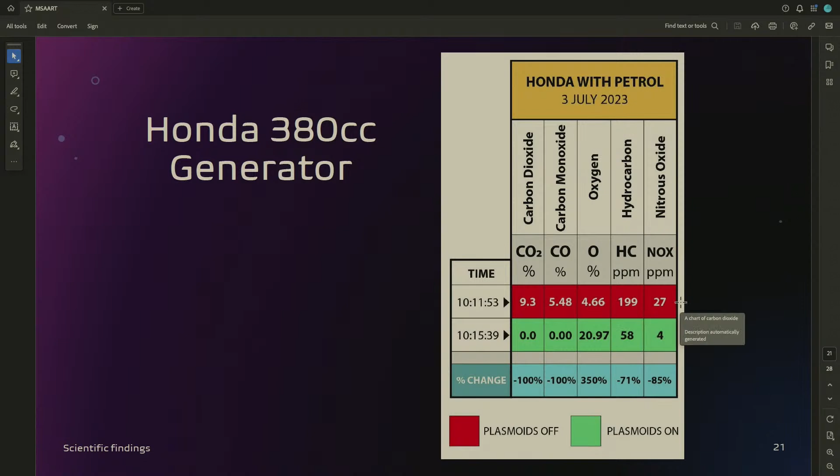But you know, maybe. But what I can say is, when the thing is operating, you don't smell a lot of hydrocarbons. And if I'm hanging around by an exhaust where it's kicking out 5.48% carbon monoxide and it's in confined space, I would imagine that I would get a headache and fall over rather quickly. So certainly the smell wasn't there. But then there are other things that might be produced which could be odorless, and so these things need to be investigated.

This same generator, they can switch over from petrol to tip gas, and this was the other piece of data that was shown, the Honda with tip gas. And again, with the tip gas, you have this big drop. But interestingly, the carbon monoxide is already low here, but it still gets reduced. The oxygen seems to go up, and so it's interesting.

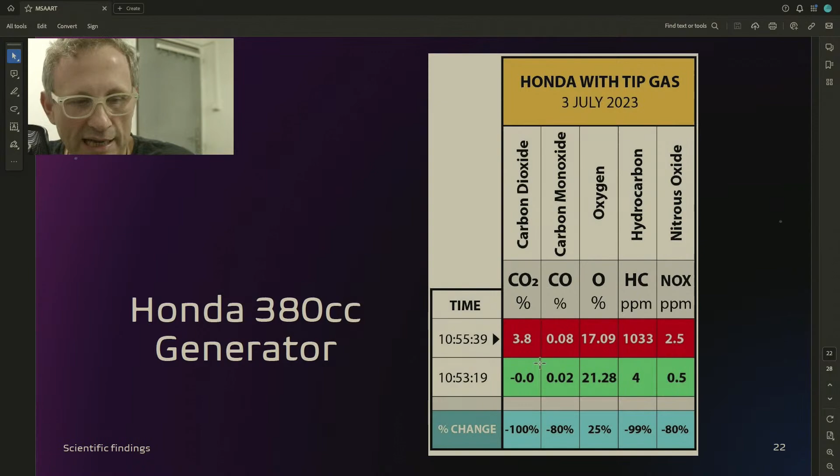But where is the carbon going? Now, when it comes to the big device, this particular client is only interested in the carbon monoxide because they have a limitation with how much carbon monoxide they can run in a particular area.

And so I think it limits them to 4 generators in this particular area, but they can actually host a whole load more. And the reality is that if the limit is 4 times this amount, it means you've got 4 times the amount coming out from one generator. But if that's going from 4.52 down to 0.09, it means that they could basically stack out this whole area that they could fill with generators and maximize their return for their investment. This is over and above any potential gains they might gain from any extra efficiency.

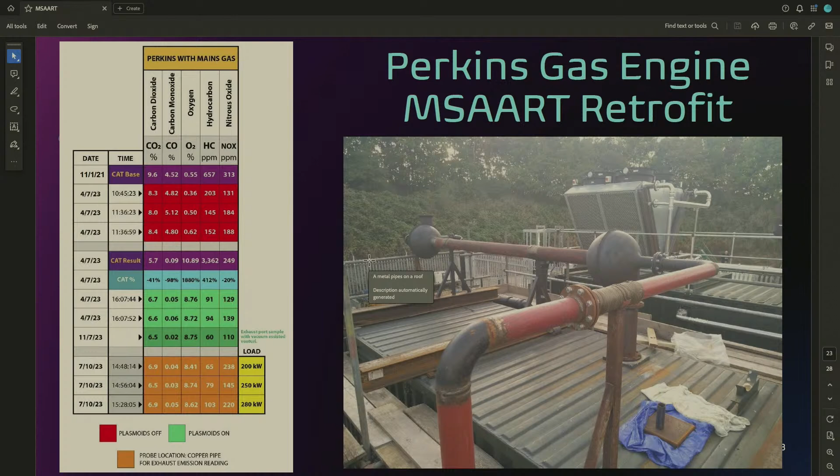So that alone is beneficial to this particular customer, and that may be the case for many customers. And the reality is, actually, Malcolm told me that in the Maldives, basically every island hotel has one of these generators, which is for desalination and electricity for the island, or rather for the hotel. And if they save 13% of their fuel, they use 13% less. That is an enormous saving for the hotel. Secondly, it's actually better for the environment straight up. And then thirdly, they don't run the risk of killing their hotel customers with carbon monoxide poisoning.

And actually, that is a reality for generators all over the world. There are, I would say, probably someone could go and look, but I would imagine it's not more than hundreds, not more than thousands. No, sorry, it would be more than hundreds, certainly more than thousands, maybe more than 10,000, maybe even into the hundreds of thousands of people that suffer from or die from carbon monoxide poisoning from generators.

So the idea that you could have a device and that these could actually be installed just ordinarily onto a generator. Okay, yes, so you have to add water in. Well, is that such a bad thing? I mean, typically with these generators, you have to add oil and petrol, for instance. So it's not that much more to ask to put a little bit of water in to have it run, so that it's much, much safer for you to have, let's say, near your caravan or near your small holding or in your cabin or whatever it is, or nearby your cabin.

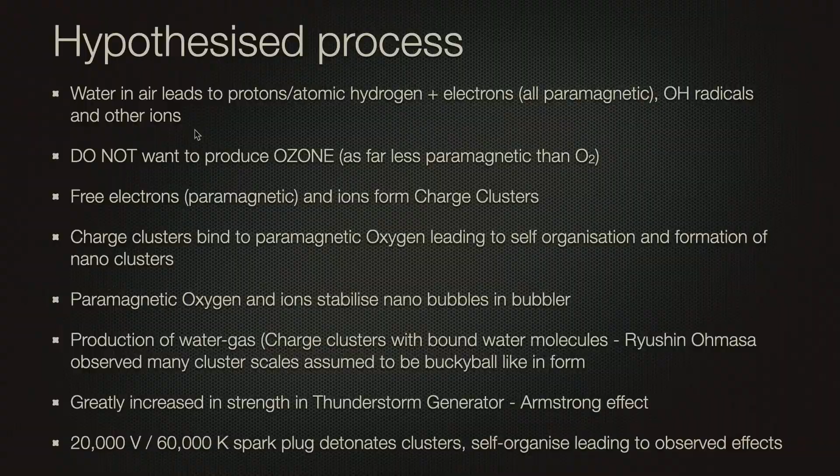OH radicals and other ions, for instance there's nitrogen in there, potentially you can get that. So where I'm coming from there is, if you've got a thunderstorm in your atmosphere, we have, if I press play here...

In our atmosphere, we know over Hessdalen there is such a thing as ball lightning. Okay, and I've talked about this in the past. When Massimo Teodorani, an astrophysicist, and Gloria Nobili, a physicist, recorded this particular ball lightning between the 5th and 18th of August 2002, that is when the water vapor in the air was around its maximum, around 10 to 10.5 grams per meter cubed.

So sometimes these things are like 10, 20 meters across, like the size of a house. So within that volume, there can be quite a lot of grams of water. And of course, we know we get—this is actually a photo from this study here, this Embla 2002, an optical and ground survey in Hessdalen—this iron-rich crenellated sphere.

So in atmospheric air, we have 78.084% nitrogen, according to NASA I think this is. Oxygen 20.946%, argon is most of the rest at 0.934%. And of the remaining 0.04338%, the majority of that is CO2. But still, the amount of CO2 in the air we breathe is incredibly small. It's 0.0407%. It's very little indeed.

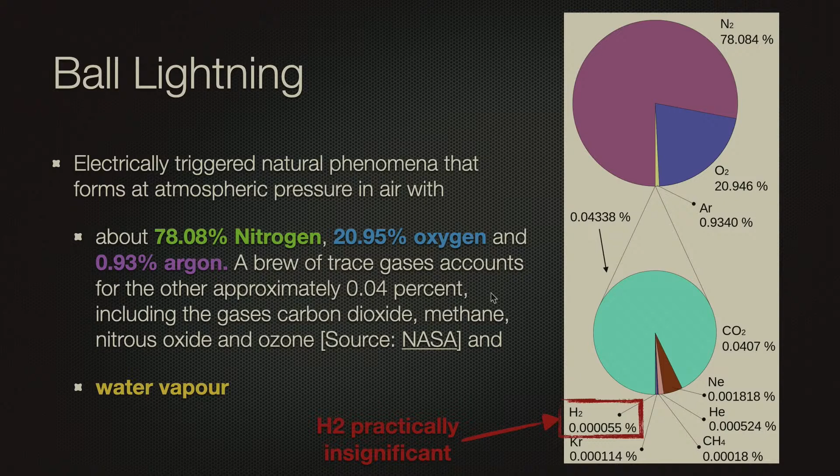So now, we've said how oxygen is extremely important in this process from the work of, well, basically a lot of low energy nuclear reactions is in fact HHO. That is to say, water is involved, whether it's DDO or HHO, it doesn't really matter. There is water involved, and that has oxygen in it. And in the case of Sundaresan and Bockris, they only got these iron-rich crenellated spheres when they actually had oxygen dissolved in the water. So I believe that oxygen is very, very important.

But we know that hydrogen also is, according to Shishkin, Karols and Dubovik, 2,000 to 4,000 times easier to create etheric matter than any other element from lithium onwards. And we have basically no hydrogen in the atmosphere to note. And so water is the greatest source of hydrogen in our atmosphere for the formation of ball lightning.

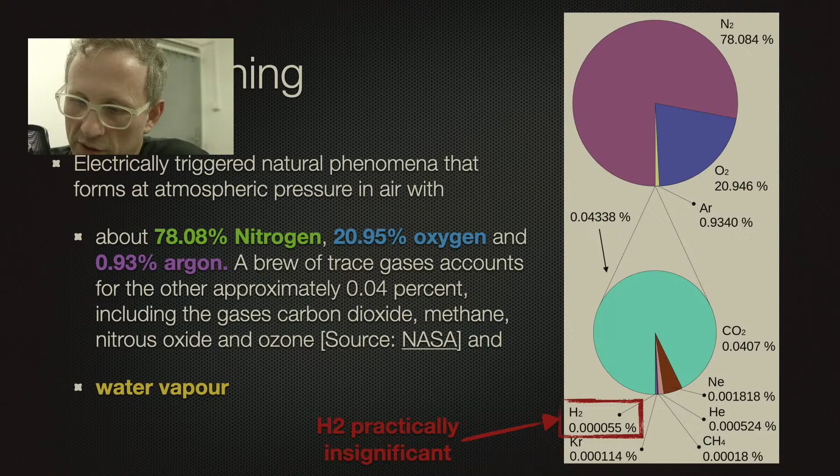And why do I say that that might be what helps us produce ball lightning? Well, I refer to the work of Matsumoto and what he called itonic clusters. And for those that weren't clear what an itonic cluster was when I presented in Switzerland, you can go and read this and download the book or get it on Amazon, but you can download it off remoteview.icu.

But anyway, an itonic cluster is where a bunch of electrons polarizes a nucleus, let's say it's a proton, so much so that it emits a neutrino and a positron. And the positron and the electron get bound by the neutrino into what Matsumoto calls an iton. This happens over and over, and it forms a cluster of these itonic bound structures, and in the center you get neutrons.

That's what he thought, but regardless of his view, he says his itonic clusters are effectively the same as ball lightning. This was in a proposal to the proceedings of the 25th Linear Accelerator meeting in Japan, July 12th to 14th, 2000, after he wrote his book, Steps to the Discovery of Electronuclear Collapse.

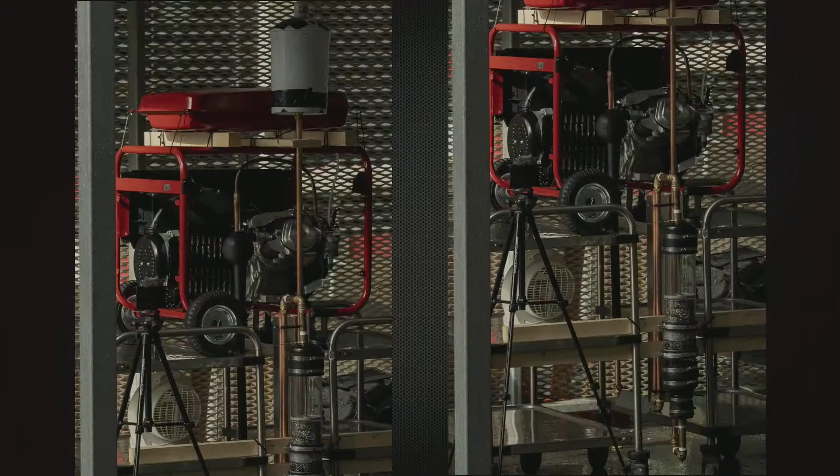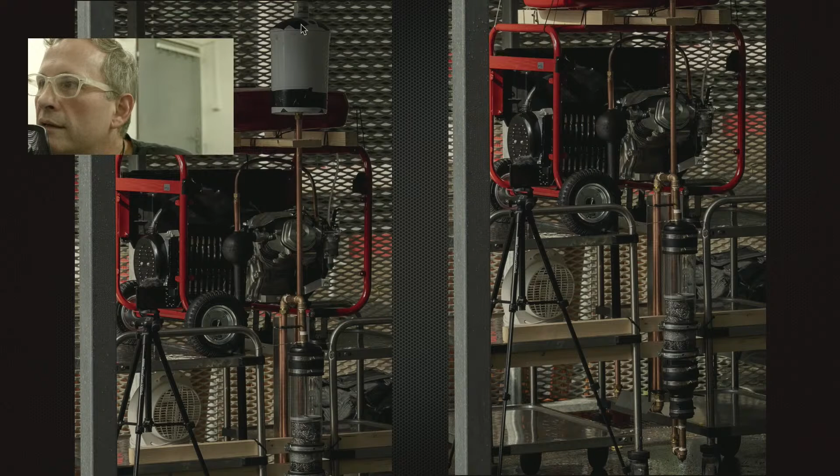He proposed making effectively micro ball lightning using bunched high-energy electrons and protons. My hypothesis was that if Malcolm was achieving the formation of micro ball lightning, it was happening in his ionizer here, which has a UVB 100 Class 5 26-watt PET lamp from America, designed for reptile use, allowing lizards and pet tortoises to fix calcium into their bones and give them strong bones.

These lamps are commercially available, and their spectrum typically goes no higher in energy than 300 nanometers. The air is sucked in here and comes through this tube. The hypothesis is that this will lead to the formation of OH radicals.

He actually states that in the bubbler, it becomes alkaline over time. If you're splitting water vapor in the air using this UV light, and if you imagine water vapor in the sky, the higher up you go the more intense the UV light from the sun, then one might imagine that creates splitting of the water vapor, giving you a bit extra hydrogen and some charge separation. It's not necessarily all about the static charge from the downdraft of cool air and updraft of warm air producing charge separation - that could instead be happening through UV processes, high energy photon processes.

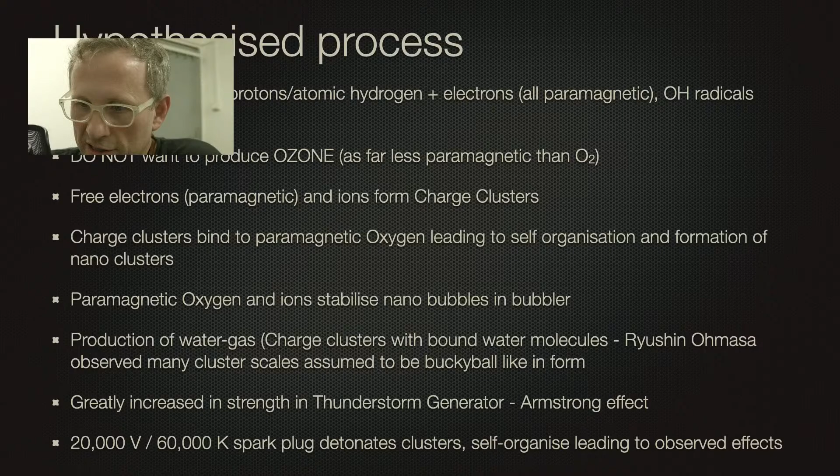Let's assume that's occurring, and we are forming our toroidal clusters of coherent electrons and ions, principally hydrogen. What we don't want to do is produce ozone, because that is far less paramagnetic than oxygen, and the clusters can't bind to paramagnetic oxygen, and the oxygen itself can't then cluster together in larger clusters. So we definitely want to produce bunched electrons.

How do we get bunched electrons? I'll talk about this more later in the week - I have some concepts around increasing the bunching. But what I proposed during the presentation was titanium oxide, because I think titanium oxide behaves like metal itself. That would be titanium oxide as a film, or a doped version on titanium metal. It's hydrophilic like the metal is, and allows for photocatalytic splitting of water.

Now, 300 nanometers is technically just about capable of doing it - I think it's more than capable, in fact. But you also want the photoelectric effect on titanium oxide. You could use zinc oxide here, or copper oxide for the photoelectric effect - I described how that's available in the copper pipe subsequent to that. But you need to potentially increase your rate of water dissociation.

So you get a lot of free hydrogen available, and at the same time you want a whole bunch of free electrons to go through this ionization, cluster-forming process. If we do get to producing these clusters, Ken Shoulders was very clear that in the white state, you're able to produce white state clusters that spew out 2 kiloelectron-volt electrons in all directions. We only need, from titanium, I think 3.2 electron volts, and from copper, 4.3, certainly less than 4.5 electron volts, for the photoelectric effect.

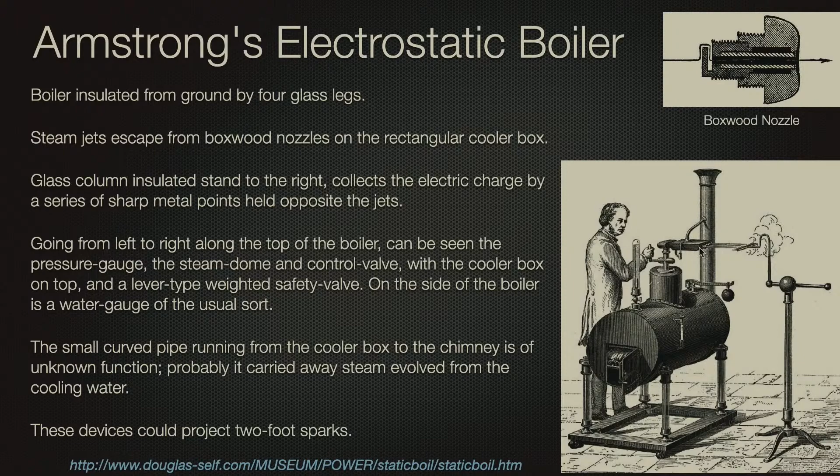Now, I don't think the person that wrote this was able to look inside this device. And whilst the rest of it seems relatively clear, I think what might be going on - and again this is my speculation, as his speculation was this was cooling water - my speculation is that you've got superheated steam here, potentially at hundreds and hundreds of degrees, and it comes through here, and it actually flash boils, producing intense cavitation, or rather, it just heats the water. So this is steam, but it heats the water that's in here to superheated water. So it's still water, but it's like in a pressure cooker - it cannot escape. And that, to me, explains why this is a very, very thick thing.

This is a very thick thing. And I think what might actually be happening is that steam is effectively going through a bit of a heat exchanger here, and it's actually just the steam that's been through that heat exchanger that then comes out and into the exhaust from the flue, from the burning hydrocarbon down here. So I don't think this is just cooling water that's then boiling off - I think this is the residual steam that's coming from up down here.

Now, what that means is that you've actually got hot water that hydrodynamically gets vorticized around here in multiple aspects, and then it comes into this capillary where it becomes a toroidal soliton already with complex hydrodynamics going on in here, and it comes through this capillary to this point, at which point it goes from the extremely high pressure in here to 1 atmosphere. And so it instantaneously turns to steam at this point. In doing so, you have a toroidal structure that instantaneously turns to steam, and therefore you might have this intense charge separation in a toroidal vortex here, which will project the charge through to be caught on these spikes.

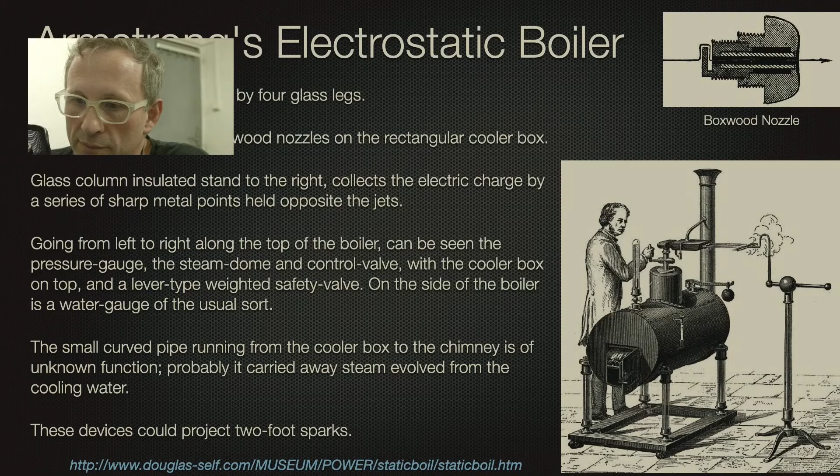I think something similar might be going on in the Thunderstorm generator. When you come into this bottom sphere, which you can't necessarily see but could on the very large one, it's very hot. From the thermal imaging, the metal was at least 200 to 240, 250 degrees centigrade, which would be flashing to steam. So maybe a similar effect is occurring, but to a lesser degree, and you get some charge separation going on from down there, meaning it's charged, and the plasma coming out of the engine is also charged.

And it's forced into two vortices.

Now this is where I need to introduce the data being shared by the person doing a replication. I think it's in New Mexico.

Actually this is quite exciting news, because Malcolm Bendall has agreed to give the MFMP a kit for conversion of the Golf 1300cc engine that was acquired for Henk Uren, who is going to do it as a GEAT and may still do it as a GEAT. If we get this kit applied to the 1300cc engine, we'll be able to have a direct analysis of a car engine - it's a Golf 1300cc engine.

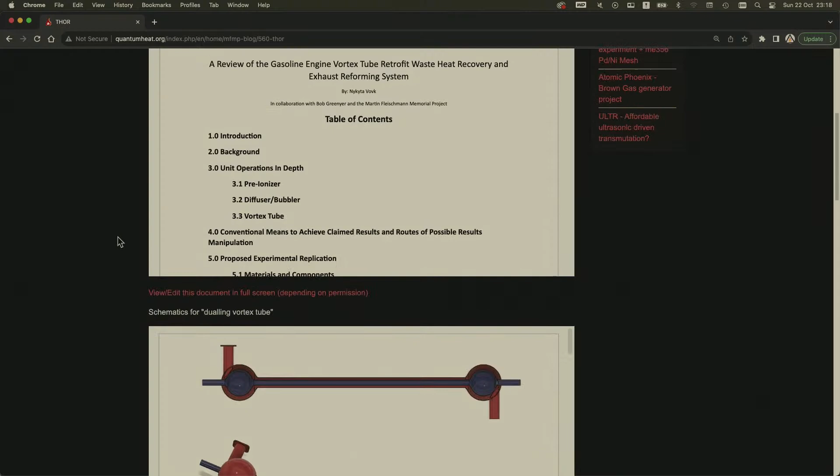Anyway, you will see on the THOR thread there are two live documents here, and you can comment down the bottom if you wish - I need to catch up with people's comments there and add in some thoughts. If you click on that, you can actually view it in a separate window, in theory. It's pulled it down here, but we'll put it up there as well, and we will go into here.

And there's this other document here, which again has dropped down there. Okay, it's dropped it in there - okay fine, it's not doing exactly what I want.

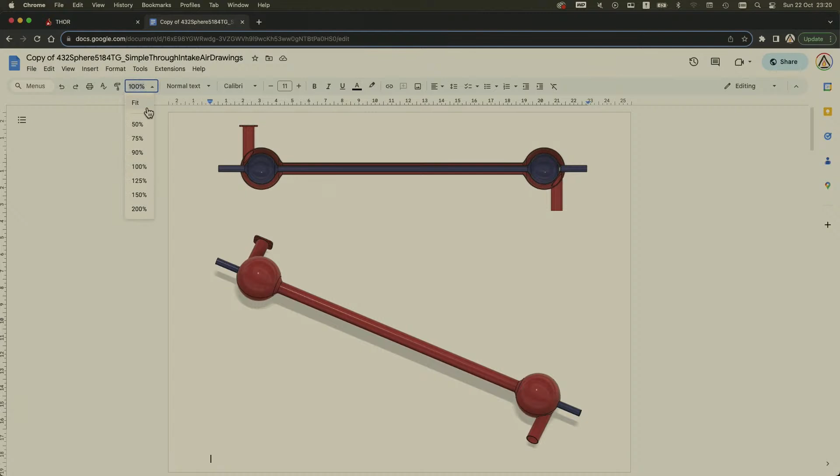Right, so in this one we've got a rough structure of the internals of the double-ended vortex tube, the so-called dualling vortex tube in Malcolm speak, and here's the close-up of the inside. I think he calls this the 432 - maybe. I don't see that necessarily as being 432 as I'm looking at it there, so I think probably it's a different ratio than is shown in this diagram.

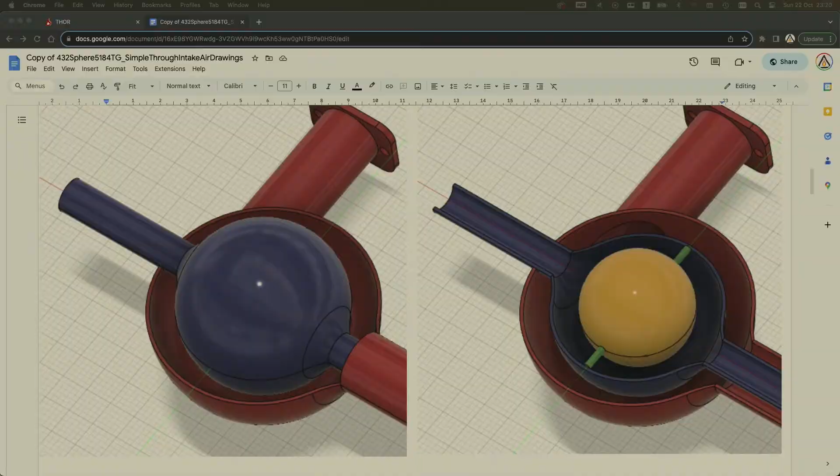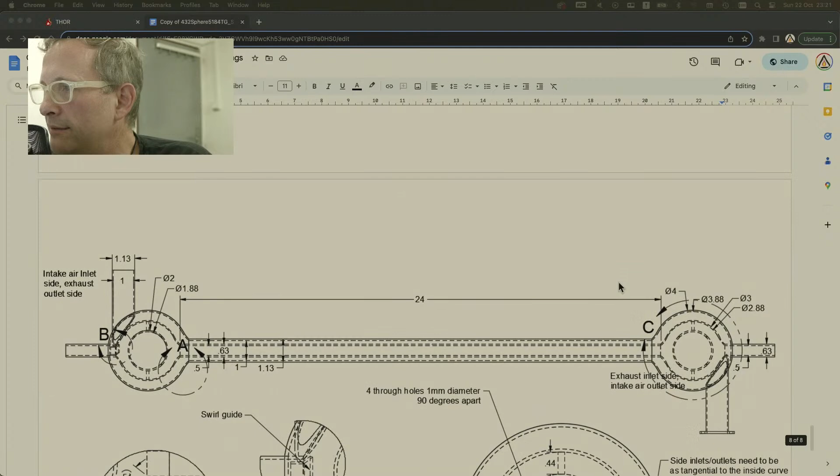Anyway, so this is basically the rough layout, but you can see the ones we've shown him holding in his hand, and I think it's a slightly different ratio, but you get the idea of how these are arranged. The center one's hollow, and there's some means of connecting this one to this one, and so forth. Interestingly, you can see there's a swirl guide placed into this part of the device, and I think there's one also that goes at the bottom - I guess that's forcing the vortex initiation, maybe. A swirl guide, yes, it's actually detailed here as a swirl guide, if you can see it.

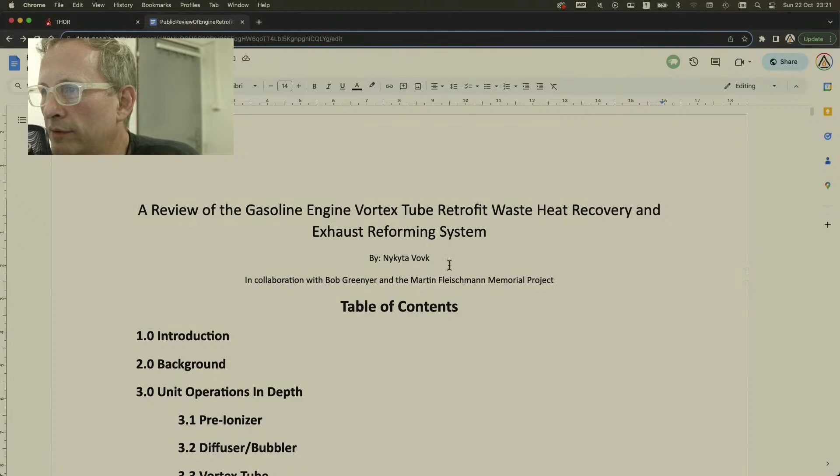Now, if I go back, this is the public document. The interesting thing is this work is being spearheaded by Nykyta Vovk, I hope I've said his name right. You can ask to help out with this document, that would be great. There's a lot of things we've already clarified, because they're talking about which alloy was used on the demonstration model, and the power of the lamp make and model. We know those things now, so we can go in this weekend and correct these things. However...

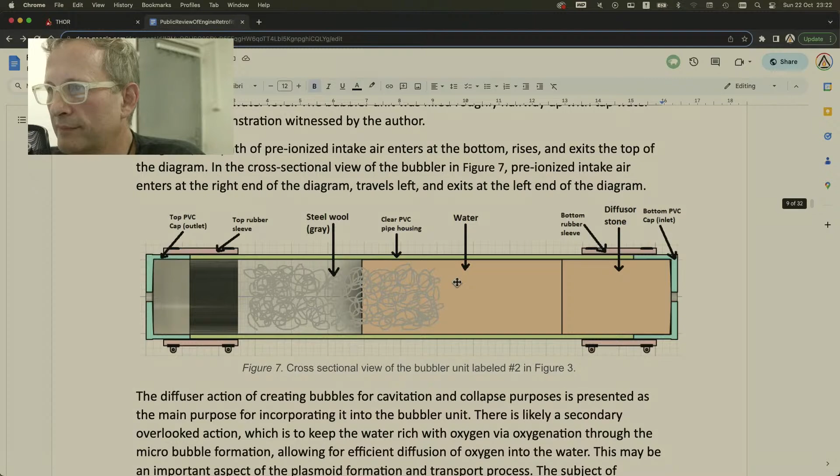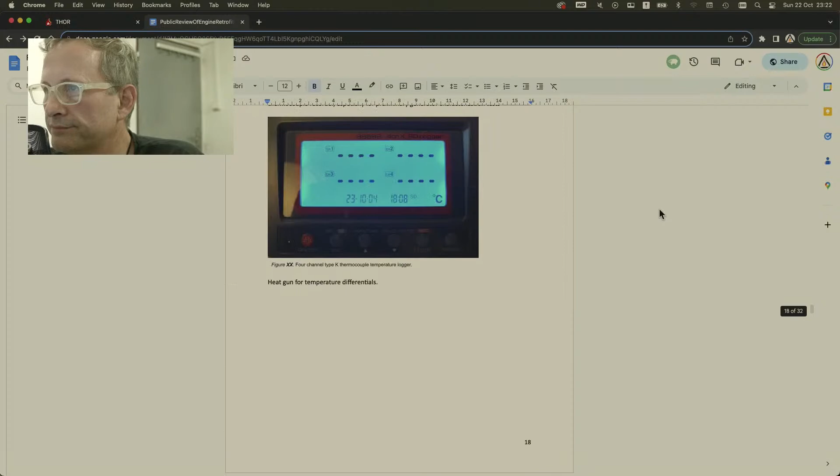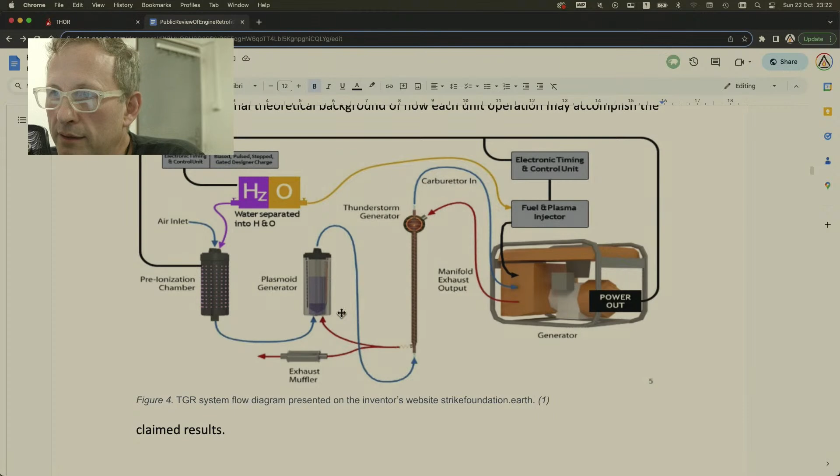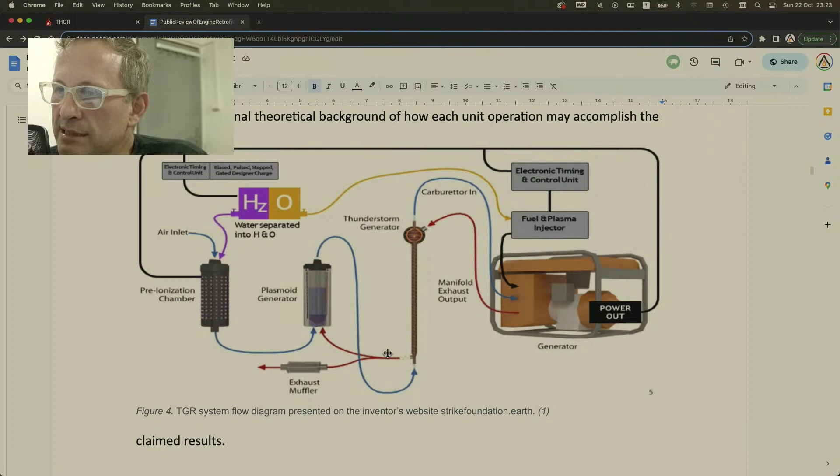Now, this is something that was done with the Geet. Of course, this could be done with the Thunderstorm generator. However, in all of the embodiments that I've seen, the 400 kilowatt generator and the one in Switzerland, the exhaust just came out here. In fact, there wasn't even an exhaust muffler on there, much to everyone's being upset, certainly my ears. Anyway, I will give a potential reason as to why, both on the Geet and on this system, this may have been beneficial. And it's not for the reason of atomic splitting, as was claimed for the Geet, of carbon all the way down to hydrogen atoms, okay?

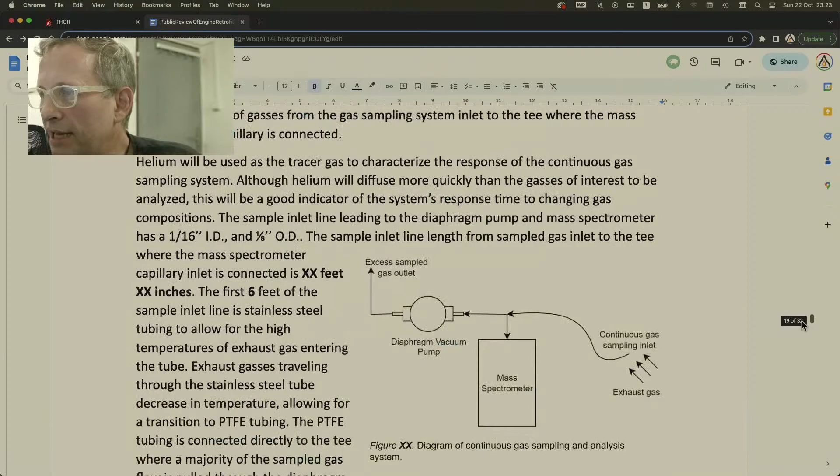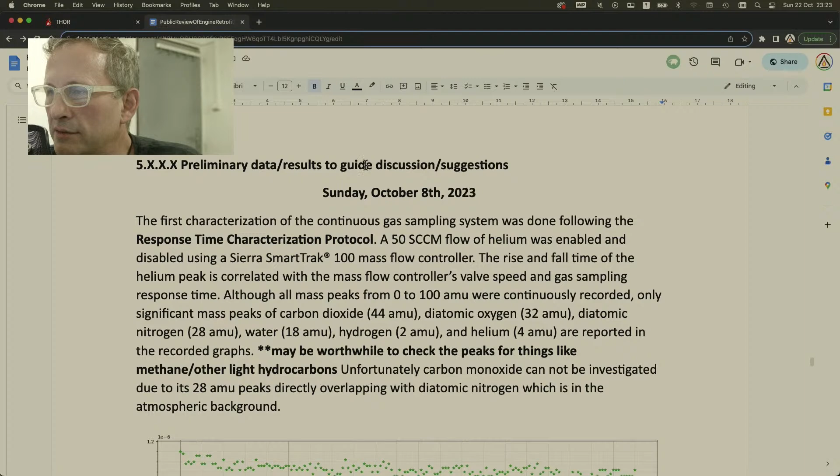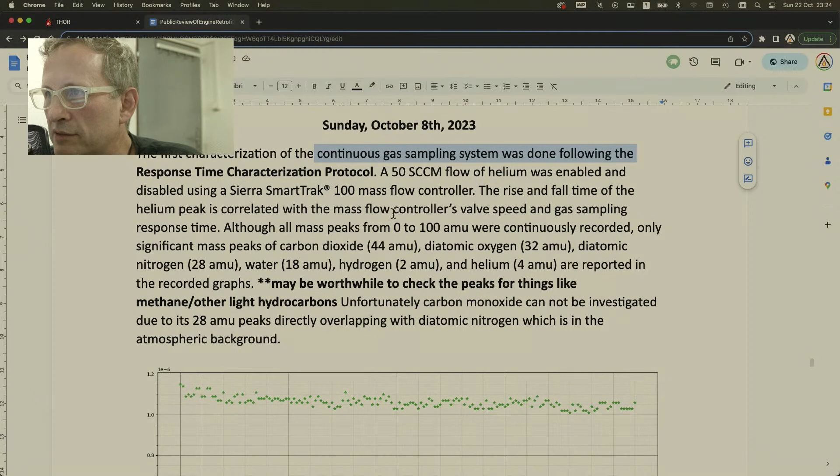But anyway, going on to what I wanted to say, which is actually about the data. So Nykyta's got some data here: preliminary data results to guide discussion suggestions. This is from October the 8th, 2023. The first characterization of the continuous gas sampling system was done following the response time characterization protocol. A 50 SCCM flow of helium was enabled and disabled using a Sierra SmartTrak 100 mass flow controller. The rise and fall time of the helium peak is correlated with the mass flow controller valve speed and gas sampling response time. Although all mass peaks from 0 to 100 AMU were continuously recording, only significant mass peaks of carbon dioxide (44 AMU), diatomic oxygen, diatomic nitrogen, water, hydrogen, and helium are reported in the recorded graphs. It may be worthwhile to check the peaks for things like methane and other light hydrocarbons. Unfortunately, carbon monoxide cannot be investigated due to its 28 AMU peak directly overlapping with diatomic nitrogen, which is in the atmospheric background.

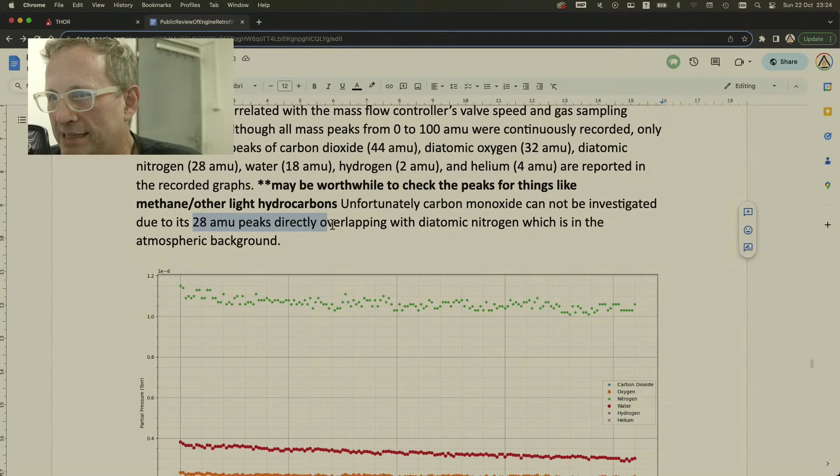So down here, you have the helium with the pulses. You have hydrogen here, so this is kind of the baseline for hydrogen. Water up here at around 0.35 partial pressure coming down to 0.3. Nitrogen up here, oxygen in the middle here around this level. Okay, so...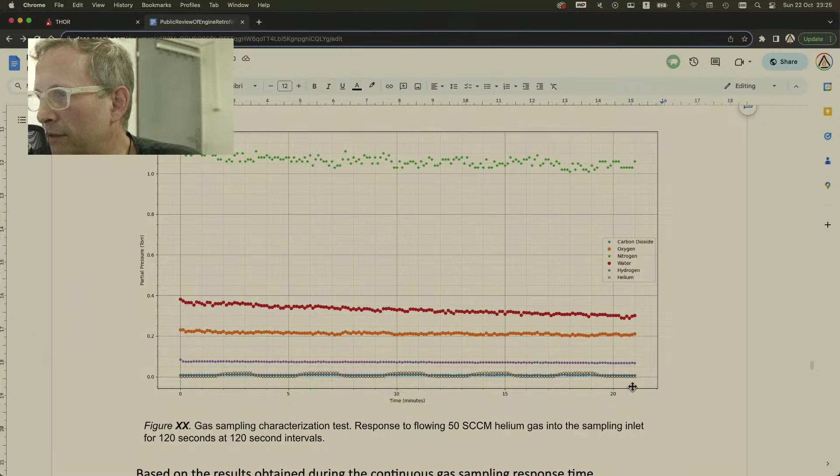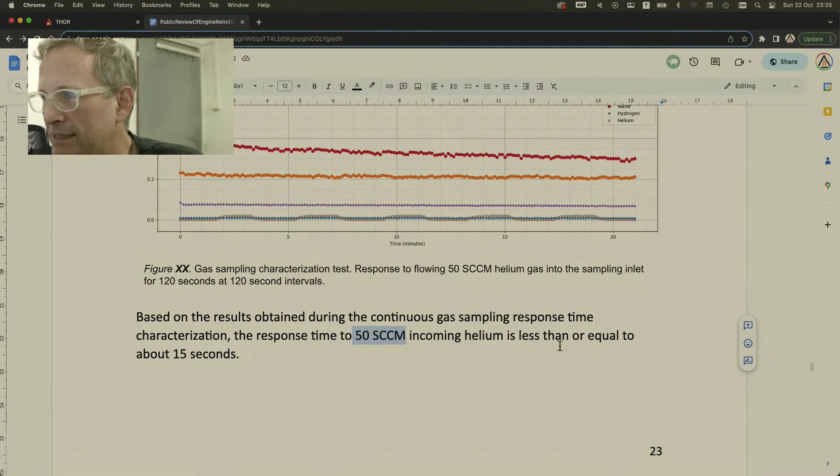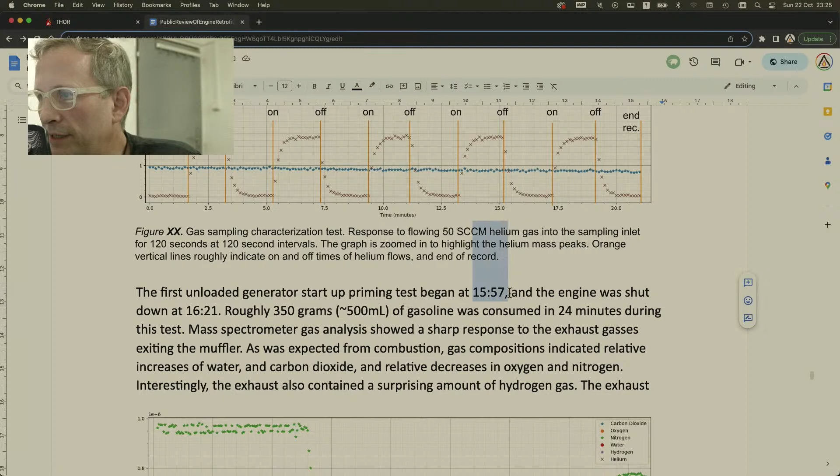Based on the results obtained during the continuous gas sampling response time characterization, the response time to 50 SCCM incoming helium is less than or equal to about 15 seconds. So that's how long it takes to know what's going on. The first unloaded generator started up. Priming test began at 15:57 and the engine was shut down at 16:21. Roughly 350 grams of gasoline was consumed in 24 minutes.

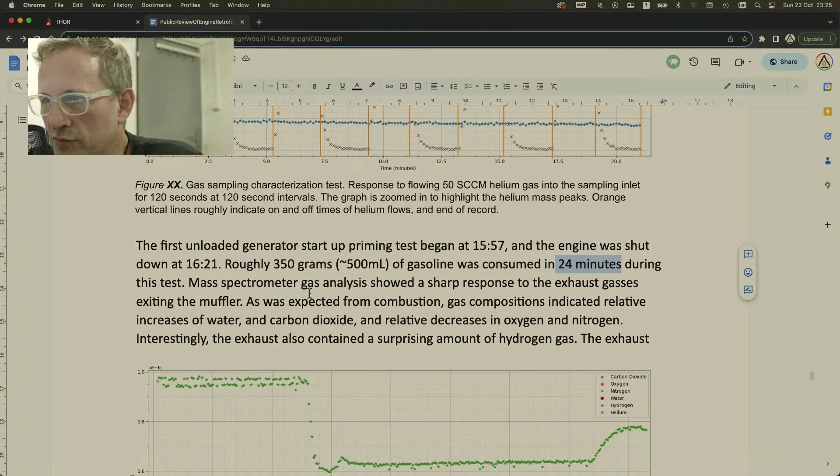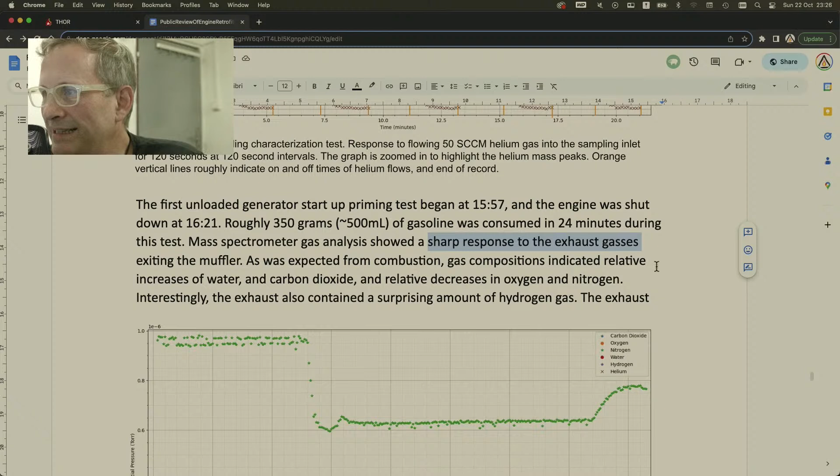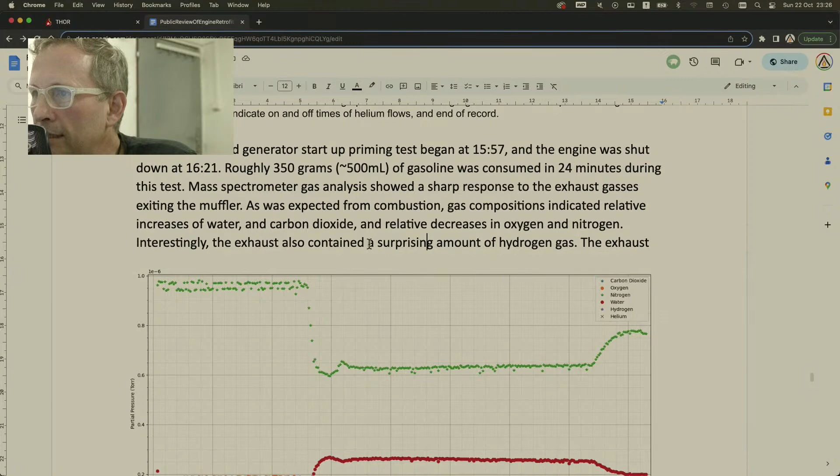During this test, mass spectrometer gas analysis showed a sharp response in the exhaust gases exiting the muffler. As was expected from combustion, gas compositions indicated relative increases of water and carbon dioxide and relative decreases in oxygen and nitrogen. Interestingly, the exhaust also contained a surprising amount of hydrogen gas.

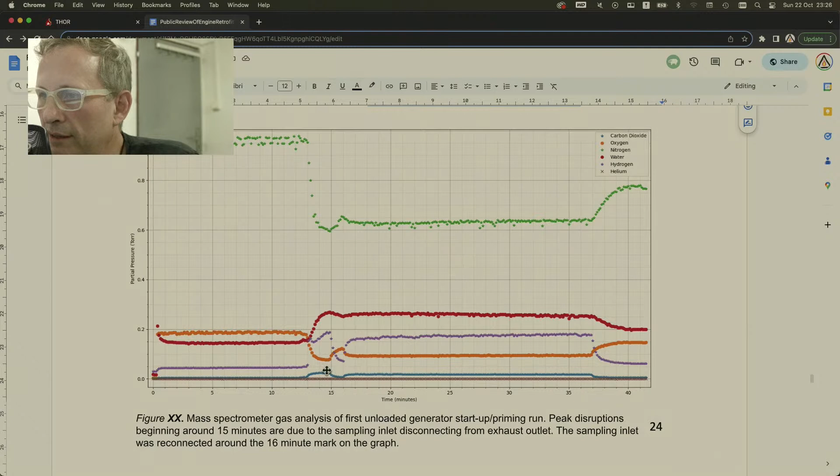There's the baseline, pretty much like what you saw before, or somewhere down here. It says peak disruptions beginning around 15 minutes are due to the sampling inlet disconnection from the exhaust outlet. The sampling inlet was reconnected around the 16-minute mark, so around the 16-minute and 15-second mark is where you've actually got the meaningful data here. See, the nitrogen is dropping down, the water is going up, as one would expect—you're burning a hydrocarbon in oxygen, so you're going to synthesize water. The carbon dioxide here is going up, but they say there's an issue with the calibration before, potentially not here. And then the oxygen has dropped down, okay?

But it's this hydrogen here which is quite interesting, and he's actually blown it up here. You see the hydrogen goes from way down here all the way up to here, okay? So what is this indicating to you? Well, it's indicating to me that, firstly, there's no helium. There's no helium, look, down here.

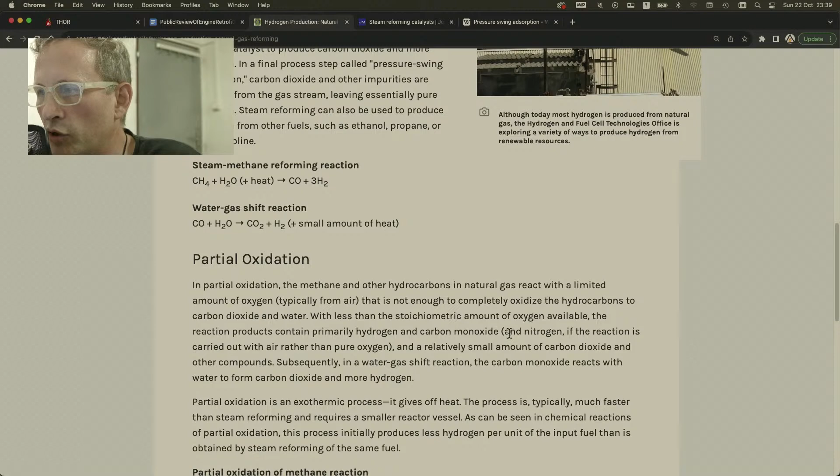Now there is another process called partial oxidation. In partial oxidation, the methane and other hydrocarbons in natural gas react with a limited amount of oxygen, typically from air, that is not enough to completely oxidize the hydrocarbons to carbon dioxide and water. With less than the stoichiometric amount of oxygen available, the reaction products contain primarily hydrogen and carbon monoxide, and nitrogen if the reaction is carried out with air rather than pure oxygen, plus a relatively small amount of carbon dioxide and other compounds.

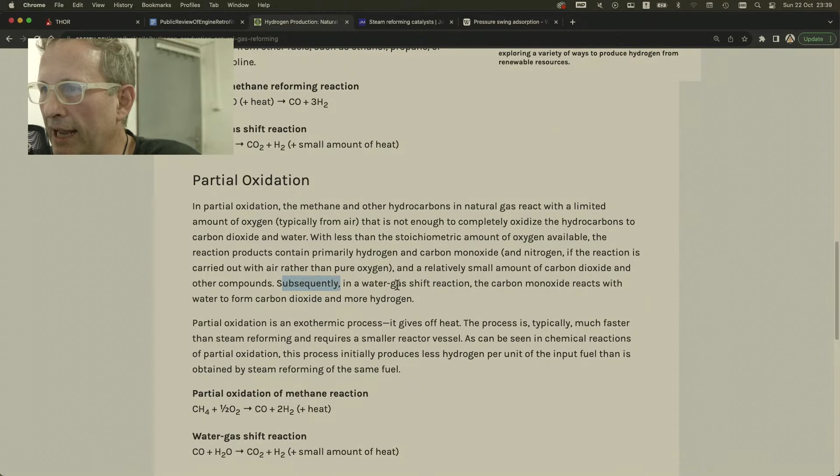Subsequently, in a water-gas shift reaction, the carbon monoxide reacts with water to form carbon dioxide and more hydrogen. Partial oxidation is an exothermic process - it gives off heat. The process is typically much faster than steam reforming and requires a smaller reactor vessel. As can be seen in the chemical reactions of partial oxidation, this process initially produces less hydrogen per unit of input fuel than is obtained by steam reforming of the same fuel.

So partial oxidation, which produces heat, doesn't require heat - it produces heat. You get CH4 plus half O2 goes to CO plus 2H2. And then using the water shift reaction, CO plus H2O goes to CO2 plus H2. So you get 2H2 here and you get H2 there.

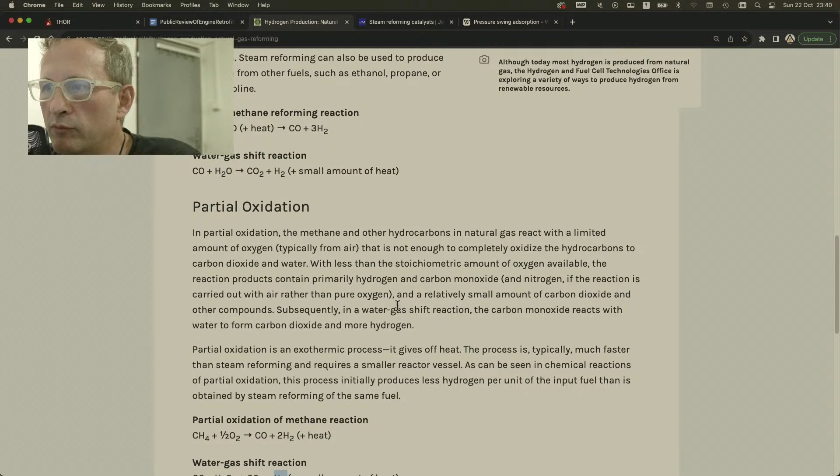This is when you have less oxygen, you have nitrogen in there, and you're getting a two-stage reaction. Again, you get this CO plus an amount of H2, and then the water-gas shift reaction. But both of these processes are exothermic.

One might imagine that if this was occurring in the reactor, then it would actually produce heat. So you might be losing some heat by not properly burning the hydrocarbon, but you are recovering the heat. Let's say that the thunderstorm generator is actually doing this process - you're going to be recovering some of that heat in your actual heat exchanger. So in the actual engine, you produce a little less heat, okay?

But as it comes round and that heat is exchanged into here, and also the reaction that then goes on to produce more hydrogen comes down here, it also yields the production of heat, which can then heat the air going in. So overall, the engine might be running at similar efficiency, and it would appear potentially a slightly higher efficiency. So in this scenario, you could have a scenario.

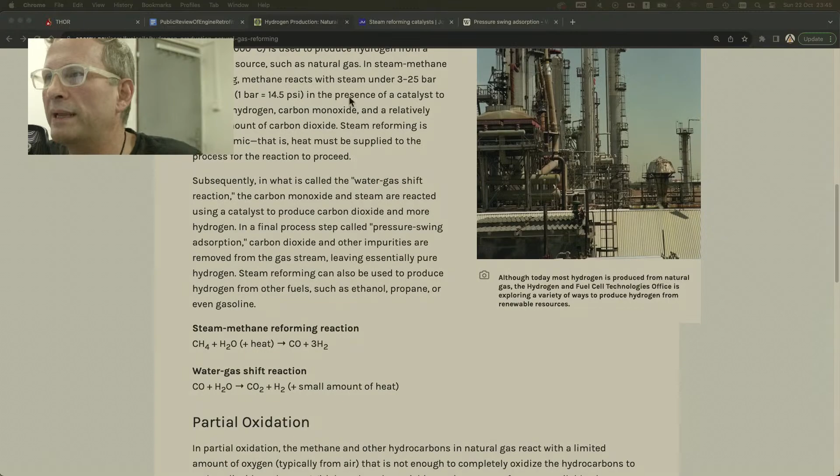But if there is some hydrogen reforming going on, this would explain a number of things. One, no carbon monoxide on the flues, because there's plenty of oxygen available in the overall process to produce carbon dioxide. Two, it would potentially explain the lowering of things, because there's water going into the process, and the bubbler maximizes at whatever temperature you're running the device at.

It maximizes the grams per kilogram of air — that's grams of water vapor per kilogram of air that are going into the system. And because of the heat exchanger, that becomes steam. So that becomes definitely water gas, and that's going into the device.

So you've effectively got some steam reforming potentially going on. And if that's the case, you're going to have CO2. You're going to have no CO because there's plenty of oxygen to make that into CO2 through this 2-step process. You are going to see oxygen because you're throwing a lot of water in there, so you're going to possibly get a lot of extra oxygen left over, potentially.

You've potentially not even using the oxygen that's coming in with the air, because you're getting most of the oxygen from the water. And the balance is hydrogen. So you have oxygen from the air that isn't used because you get most of the oxygen from the water, and the balance is hydrogen. And then what do you have?

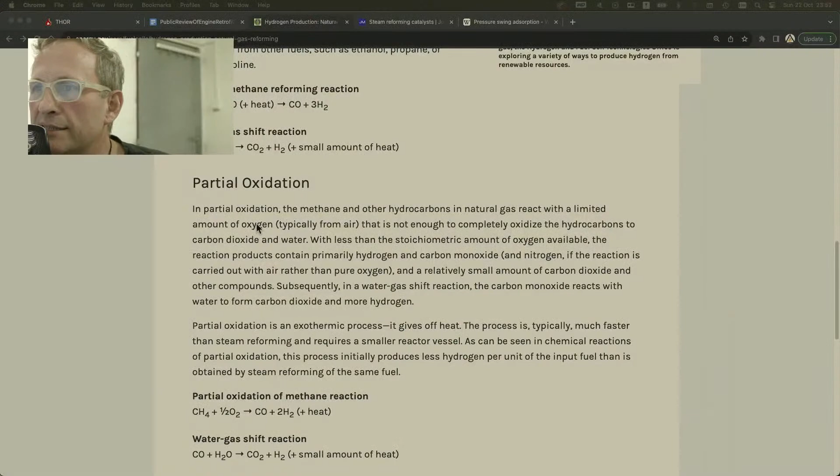And I guess they're both 1 mole coming out, but the water is accounted for separately. So the hydrogen wasn't looked at in these devices. So, yeah, so here's my point. I don't know whether I've copied it, but you can go and find it somewhere.

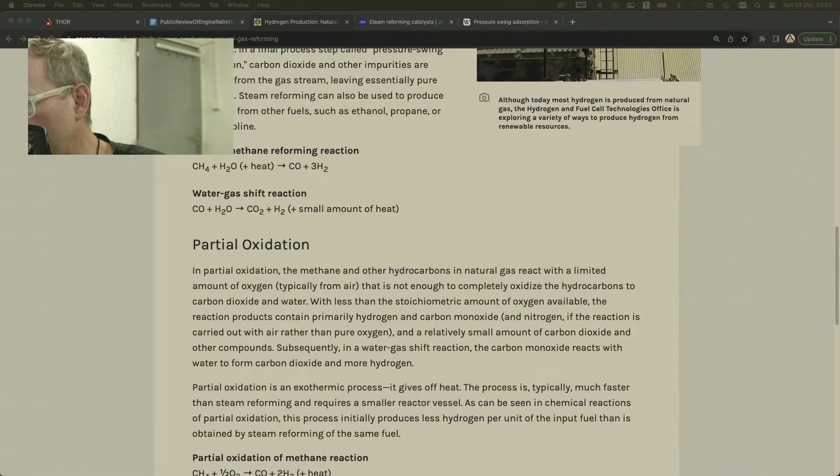Basically, the devices they use for measuring the gases typically have an infrared source, and they look for spectral absorption of infrared as the infrared passes through the gas, and that's how they determine how much carbon monoxide, carbon dioxide, nitrous oxide, HCs, and so on.

And the thing is, I don't think those devices are designed to have a lot of hydrogen or expect to see a lot of hydrogen in that path of which they do their analysis. So I've got a quote here from a site that builds these devices for looking at gases: an infrared gas analyzer measures trace amounts of gases through identification of absorption levels in a particular sample of air. Essentially, this means measuring how much infrared light is absorbed in the air. If the sample has a lot of a certain gas, the light absorbs more at a certain frequency.

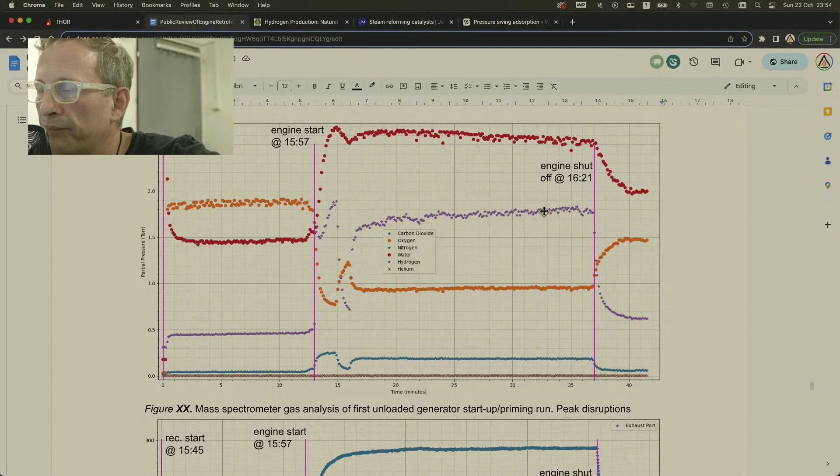Now, the thing is, I do know that hydrogen has the highest thermal heat capacity of any element. So if we have this production of hydrogen here from this reforming process, if that's what's going on, then the hydrogen with its very high thermal heat capacity - thermal being IR photons - could that be absorbing so much of the IR photons that you don't see a signal in the carbon dioxide and the carbon monoxide? It basically zeroes it out, because you can't smell carbon dioxide, you can't smell carbon monoxide. So it's not like the smell test.

We already know that and would expect the hydrocarbons to be burnt more cleanly, and that's the thing you would ordinarily smell. And so then you're just relying on the device to do the detection.

So the water has clearly gone up here. We expect water to be formed, and the oxygen hasn't gone down by as much, and that, I believe, is because you don't need as much oxygen from the air, because you're gaining oxygen from the water to fully burn the hydrocarbons all the way through to carbon dioxide, and in the process you get a balance of hydrogen left.

As I said to Malcolm from the outset, I see what I see, but my first statement about what might be going on in the device could be that it's an error in detection. This was my second major slide, that there's an error in detection, but you can't smell the HCs, so you'd need a budgie for carbon monoxide detection. You can't smell carbon monoxide either, and I don't think there is carbon monoxide there.

So it solves the carbon monoxide problem, it solves the HC problem, it gives you nice clean fuels, it efficiently burns the fuel, and it leaves your engine nice and clean, and so forth.

And if you push it really hard, some real magic starts to occur, but you don't need to push it that hard. This would explain why he's suggesting it works better with these steels. He didn't specify why they'd be a catalyst, but nickel is used in catalysis for hydrogen reforming, so it makes sense that using 316 steel with 11% nickel, versus 304 with 8% nickel, would give you a better hydrogen reforming process. Full props to Nikita Vivok for sharing that data publicly.

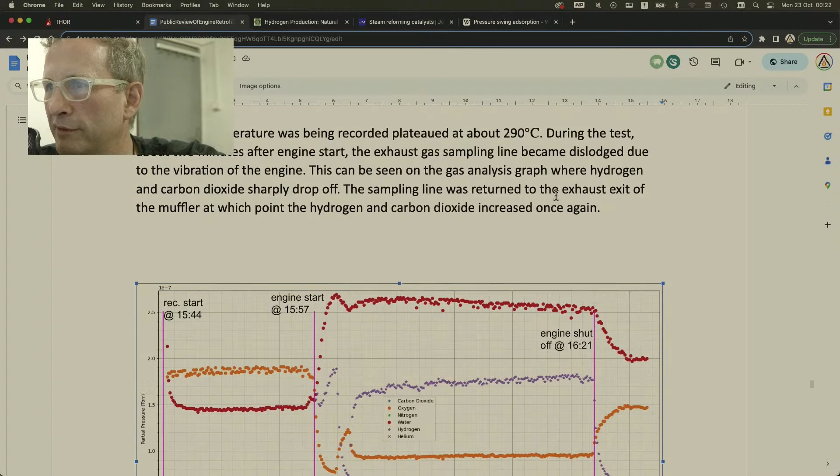And it's only because he published this data, which he says is unusual - where does the hydrogen come from? This can be seen on the gas analysis graph where hydrogen and carbon dioxide sharply drop off. Interestingly, the exhaust contains a surprising amount of hydrogen gas. It's only because he shared this and that openness that we are able to think about what's going on.

And of course, what you need, as I said in my initial presentation in Zurich, is a whole bunch of hydrogen gas, potentially, and bunched electrons. So when you've got these kind of situations, you're more likely to produce the exotic vacuum objects, the ball lightning. And hydrogen is, like I say, 2,000 to 4,000 times easier to produce etheric matter, according to Shishkin, Karols, and Dubovik.

So you've got to have the hydrogen to begin with. Well, this is making the hydrogen. Partly that's what's coming out of the engine, and potentially the rest of the process is occurring in the Thunderstorm generator.

So, in terms of being open, you can see the video that I published today. He's literally given the device that was there at Zurich to the German team that helped make it. I watched them build it, and it wasn't Malcolm doing most of the work, it was them. And they're able to take that away and do what they like with it.

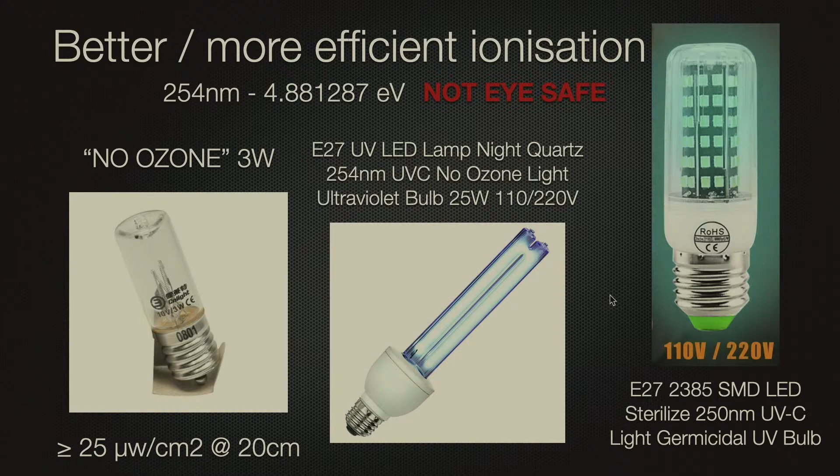But this device down here is 25 microwatts per cm, but it's actually at this higher energy photon line. So you're going to get higher energy electrons from the photoelectric effect off your titanium dioxide, and more effective photo-catalyzed dissociation of water producing hydrogen in there. And it's only 3 watts.

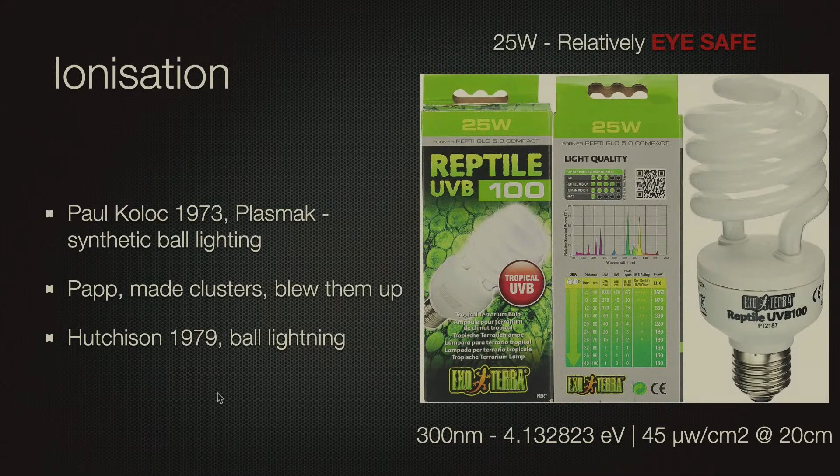So to create the amount output you've got here, 45 microwatts at 20 centimeters, you only need 2 of these running - 45 microwatts. This would produce 50 microwatts for only 6 watts, and it's a higher energy photon beam. So this is far, far more efficient. There's all kinds of ways this can be made more efficient.

And I'm going to do a video specifically addressing this subject. But it is this thing, these kind of ejections that you'll see here in a minute - one went off that way, and there'll be other ones there. These things coming out of the engine, which are the things that we possibly think are more exotic.

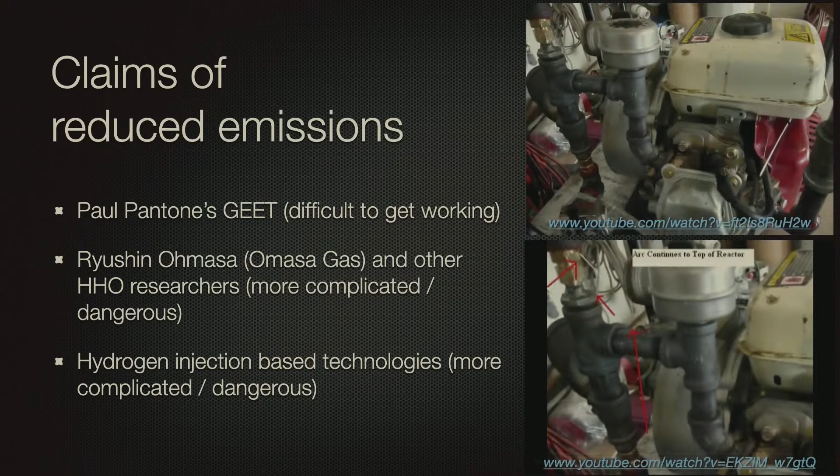And I showed in my conference speech that in the Maldives, he was looking at 23 to 26 grams per meter cubed of water in the air. Because the air temperature is higher, it can carry more moisture.

And of course, in central Thailand, that was 7 to 10 grams per meter cubed. Sorry, central Thailand here, rather, is 21 to 30 grams per meter cubed. So where he had that effect, you're talking about 2 to 3 times the amount almost of the water vapor.

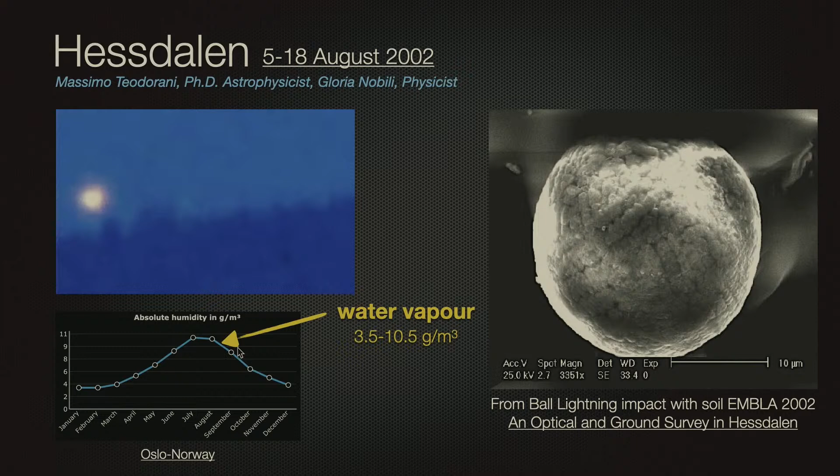That is present in Hessdalen when the Italians Massimo Teodorani and Gloria Nobili recorded this ball lightning in Hessdalen Valley in Norway, where they're seeing like around about, let's say, 10 or less, a little bit less than 10. So they almost triple the amount in central Thailand where he observed that effect.

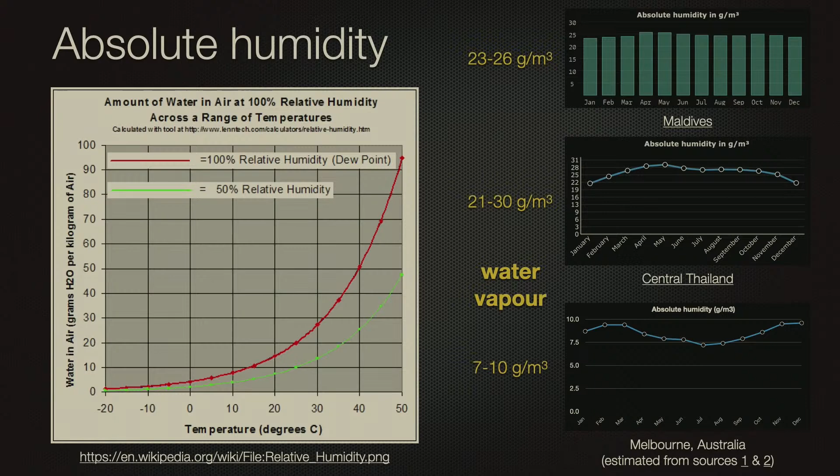But of course, the bubbler is vastly increasing. And it's like I said in the presentation, it's a trade-off between the ability of the photoionization and photocatalytic dissociation of water producing the initial hydrogen, produce the initial clusters with the photoelectric effect, as per the work of Matsumoto here, to get your protons and bunched electrons, and the having too much moisture in there where it doesn't actually allow the light photons to get to the metal or the metal oxide.

Yeah, so as Alex Del Castillo says, oh my God, so true - a catalytic converter, right in our face. Yeah.

And it is only because this is the beauty of the open process, just sharing this data, going, I don't understand why we're seeing extra hydrogen here, and then Malcolm being open and saying that the devices work better when he uses steel, which acts as a catalyst. And then I confirmed with him today that he preferentially uses 304 because that was more available, or 316, and those have 8 and 11% nickel in them, and that nickel is used as a catalyst in steam reforming.

You then start to put these pieces together, and it makes a logical argument. You are going to be better off with the lower carbon monoxide, the lower carbon particulates, the lack of soot, the lack of carbon deposits, and the full burning of the HCs is all going to be there. But I think until I have tested a claimed...

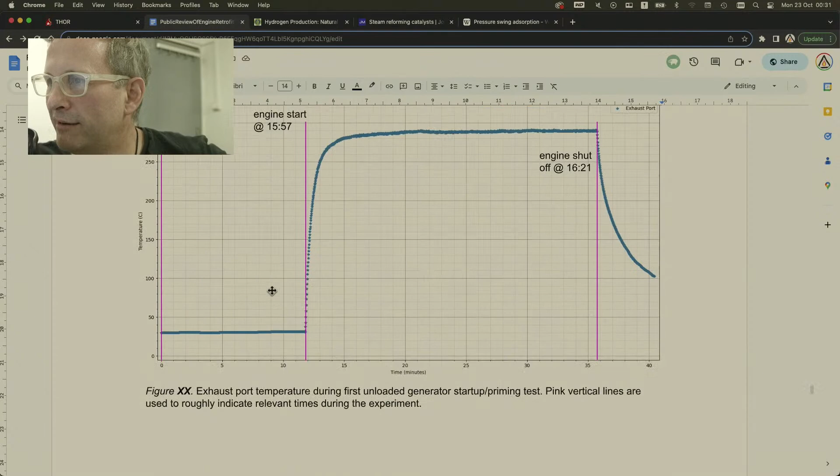Carbon monoxide and carbon dioxide claimed non-emitting device, I think it's due to the way those detectors work, with the IR being absorbed by this excess hydrogen production.

No, glasswork won't be suitable, I don't think, because you need this electrical connection between the two. So like if you've got clusters, they will be made whether we like them or not, and whether they're up at a very high level in the plasma in the combustion chamber.

And as that comes out and some of those clusters are failing, they will share their electrons, which will go through the metal and charge the incoming gases. So they're not only going to be this flashing to steam like the Armstrong electrostatic boiler charge separation.

The turbulence in there will also be able to capture the electrons released from the plasma that's coming out of the engine itself. So there's two ways in which there is this harvesting of otherwise lost energy and lost excitement, lost far from equilibrium.

Yes, Tristan, this is why the devices that they are graciously saying that they will allow us to have in order to test this ourselves, it's expensive, because stainless is not an easy thing to be able to weld. There is some talk about using direct metal laser sintering to produce the things in one piece without any welds. And you can do things like Inconel and stuff like that. Obviously, Inconel has nickel in it, so that might actually be an appropriate way to do this.

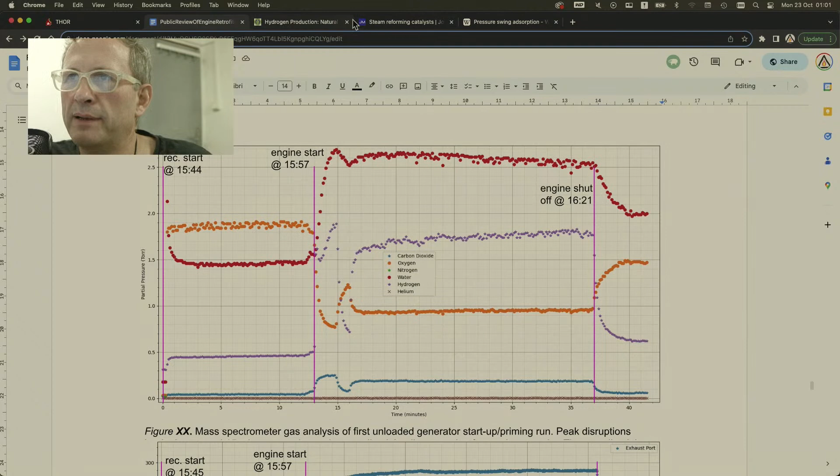So that is critical information according to Malcolm, and it's to do with, in his view, the way the vortex material is going down. It's less disruptive to them as they're going through into a different pressure domain, or a density of vortex or whatever—I don't know, but that's his view on it. And there we go. I think it's 51.84 degrees, I think.

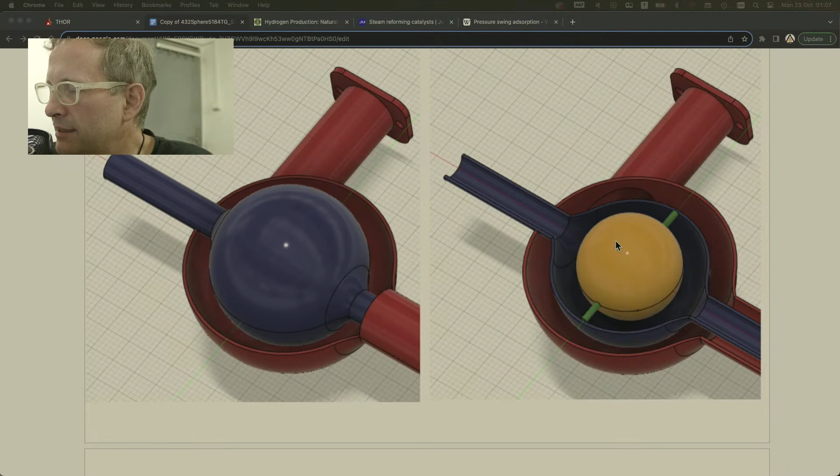So it's like having a phone and you're patenting the curved corners. He's specifically, as far as I understand, applied for a patent in the ratio of the circles and the curves, and the reason why. Certainly a bubbler is in a GEET patent as well, and so forth. So I think that's what he's done, but he tells me the reason the patent is being applied for is to prevent the technology being stopped or blocked by a third party that comes along, sees his design, patents it, and then says you can't use it - tough luck to you. So I think that's what he's saying.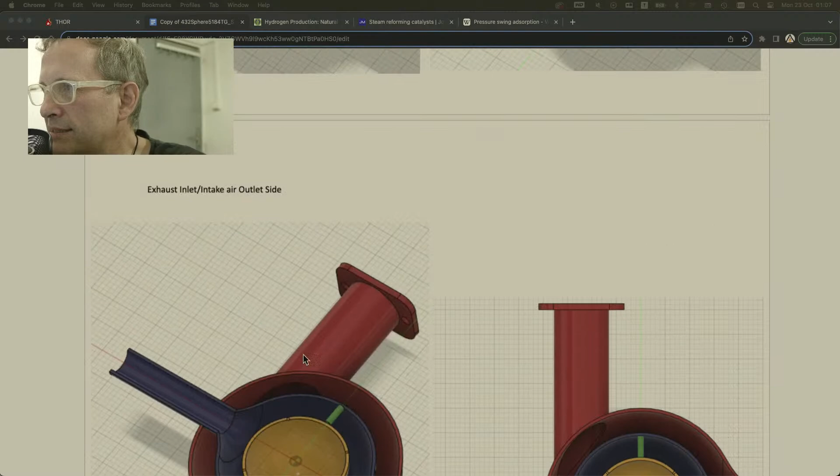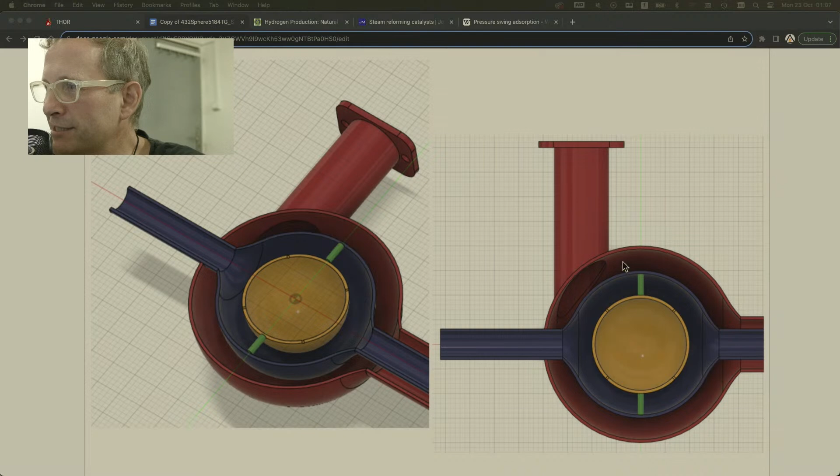And his view is that they will be in mass manufacture, and it just will be cheaper for people to buy a kit or buy a unit where it's already built in. And I would tend to agree. As someone already identified, it is a real pain to produce sections like this and then weld them together in stainless steel. So yes, it's a pain in the proverbial butt, and so it will probably be cheaper rather than someone having to buy all the equipment and materials and fail ten times, ending up costing them £22,000 to make it. It'd just be easier to buy something for £100 and throw it on, or buy one that's already built in.

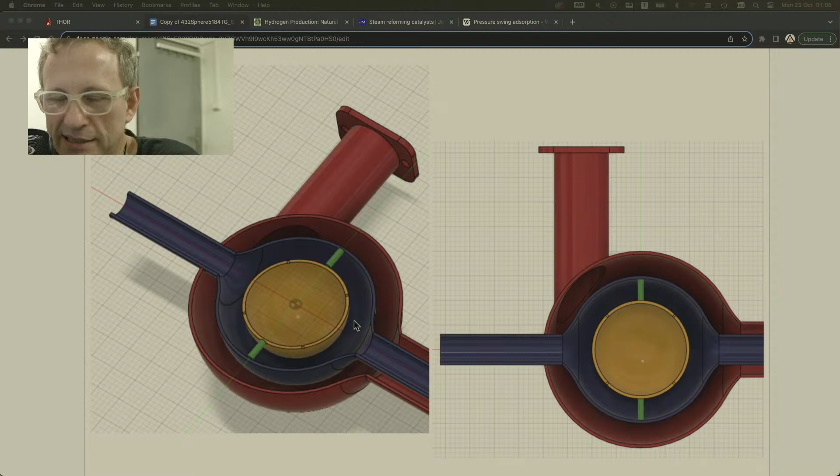Riandolthal asks, can't the flow patterns inside spheres be simulated? Absolutely, and I've suggested to colleagues in the MFMP that hopefully Chris out in Australia would like to do that. But it would be better to have the actual layout rather than these rough assumed drawings by a third-party replicator, as a kind of fact base.

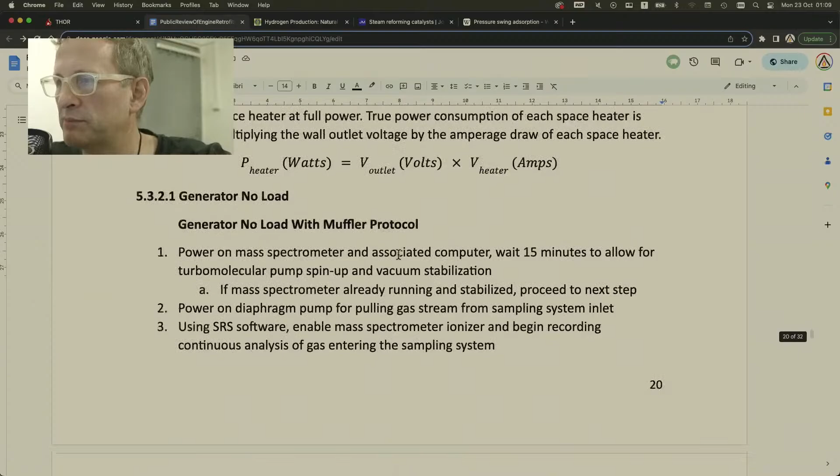He's literally calling it a catalyst, but a catalyst of what? I didn't really get that out of him. If it's a catalyst that seems to make the process work better, then it's not really describing what the catalyst is actually doing, other than making the outcomes more desirable. But if it's a process that leads to more hydrogen reforming, which something with nickel would do, then one might expect that it would be catalyzing the observed process.

So regarding pH, he thinks the plasmoids are being produced when the water is more alkaline. I'm suggesting that the water might be becoming more alkaline because the cavitation is either producing deuterium and capturing two hydrogens effectively, leaving more OH behind, or the photo dissociation of water is pulling OH ions into the water and making it more alkaline. So I think there's some potential confusion - I might be wrong, he might be wrong, there might be some switching of cause and effect there.

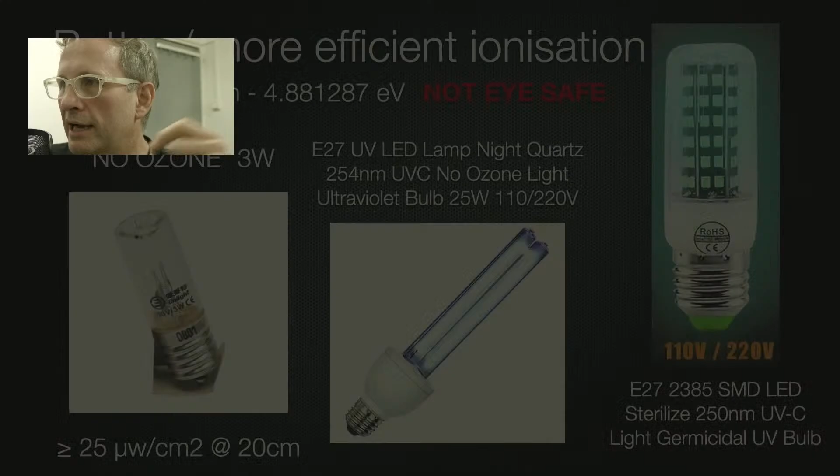I'll do a presentation specifically on the photoelectric effect. That might be the same presentation where I address some ideas that people might like to consider for optimizing the potential for doing what is being suggested here by Matsumoto.

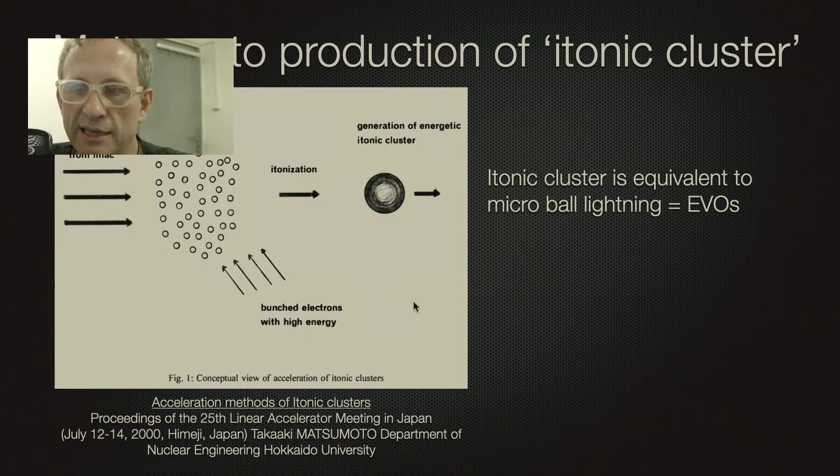Yes, RA, there's many angles where this can be researched. I think probably in my journey of evaluating this technology, other than physically seeing it and seeing the lack of carbon monoxide and seeing the lack of carbon deposits, that's telling the biggest part of the story, and then this hydrogen here is telling the biggest part of the story. It's telling me that probably all of the carbon is becoming carbon dioxide at least, and so the process is working, and that's what you would expect from a total burn.

And if you're seeing the hydrogen here, then possibly it's this hydrogen reformation process, which also works with petrol and works with methane and LPG gas, all of the things that have been shown.

Now the GEET claims to work with crude oil. That might be true, and it might be true because it has the central rod in there and it can smash up these things, and it's basically a fracker. It's a miniature oil refinery. It's taken the high chain length hydrocarbons, and with the water and steam, it's basically fracking that thing.

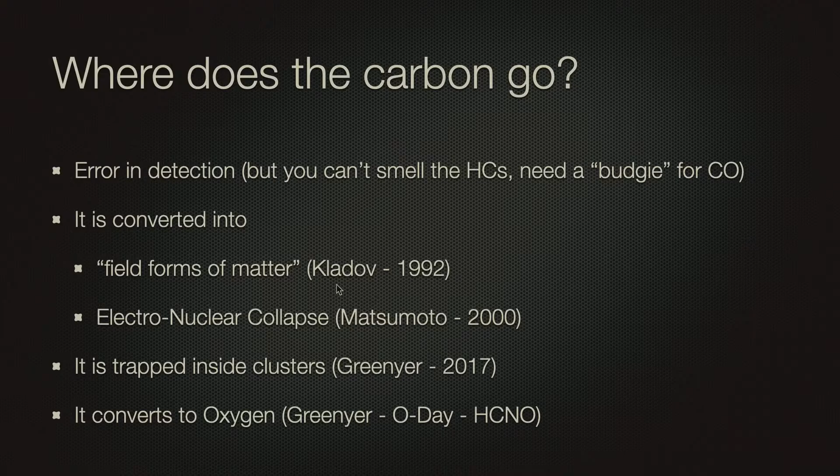So if the budgie keels over and falls asleep or dies, then probably the carbon monoxide is still there, we're just not able to detect it. I don't think the carbon monoxide is there, but I do think CO2 is there. So you just need some particular chemical, which might be calcium oxide. You pass the gas from the device through calcium oxide, and if it becomes calcium carbonate, you definitely know CO2 is being produced. But yeah, my first point there was error in detection.

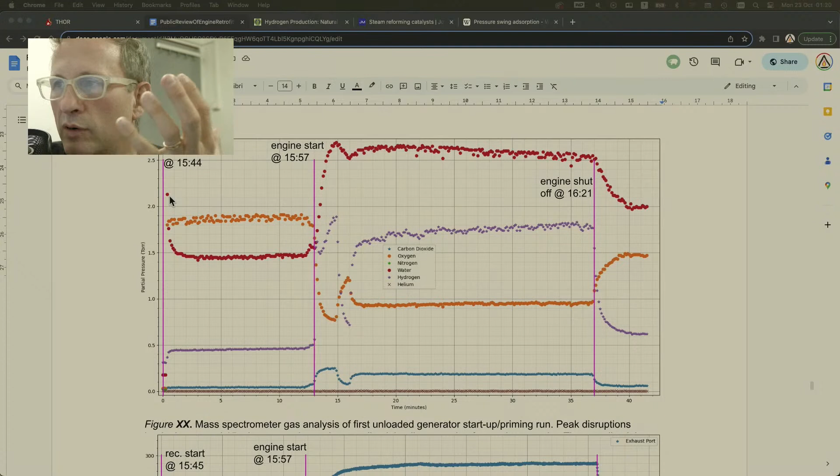So we just need to clarify that. But other than that, there are still so many ways in which the extra efficiency, the extra cleanliness in the output, and the simplification over other technologies that's been shown in the past, the continuous flow and the lack of need for a catalytic converter - this may actually be quite a lot cheaper than a catalytic converter but perform the same role. Everything else is a bonus after that, and if you're getting an extra energy source which you can find some way of using in this hydrogen that's synthesized, then wonderful.

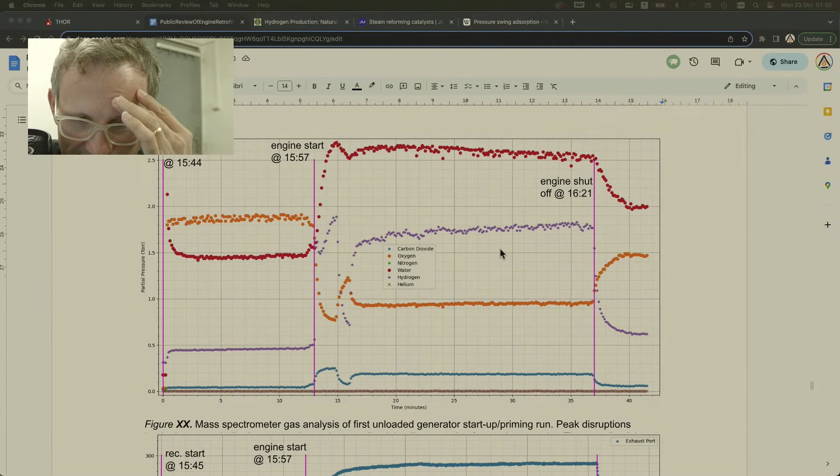Hi, Crypto Alchemist. Was there any white calcium powder deposits witnessed from running a generator in the UK? I haven't got to look into a long-running generator, one of the smaller ones. I didn't see anything particularly that was calcium, but then maybe you don't see it. When I look at the things in the Vega Valley, Eastern Plateau, it just kind of looks like a rusty kind of deposit, and it's only when you go into that you see these structures which are pure calcium oxide. So let's see if I can get the sample under the SEM.

You know, these questions will either be not answered or they will be categorically answered.

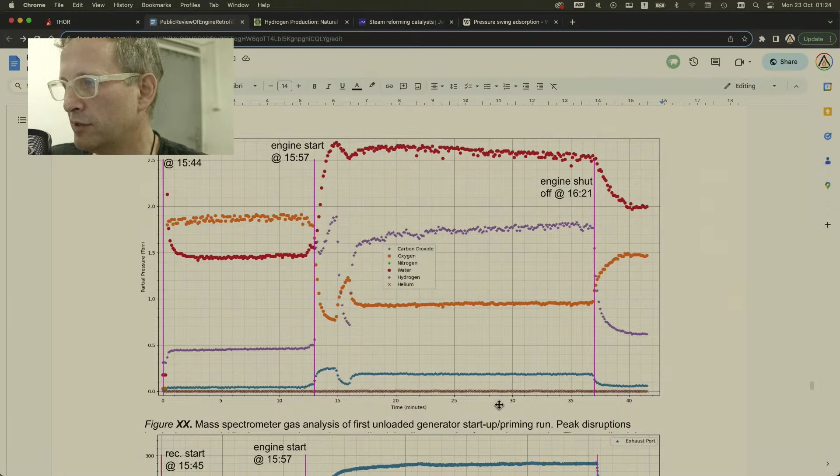So on that note, I'll say thank you very much for your attention this evening. This was THOR looking deeper. We had a look at the actual sample of the bubbler, and we can see that it's probably some silicates in there, fragments of possibly glass bottles sintered together. We walked through that probably this data with the hydrogen forming here may be due to hydrogen reformation in the partial oxidation method, and that would explain why nickel, used in steam reforming catalysis, potentially plays a catalytic role in stainless steel to improve the observation of the supposed drop in carbon dioxide and increase of oxygen out. This was not discussed by Malcolm, but it's there.